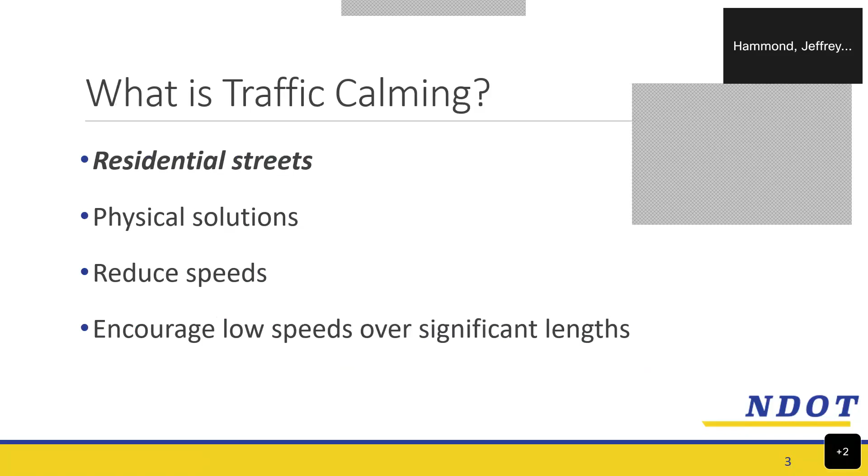So we don't focus on moving it to another street as much as just slowing it down and trying to handle it that way. And then we do focus on significant lengths as opposed to trying to handle some issue at a spot location. There are other mechanisms, other Metro programs that are more geared toward, if you want a crosswalk, there's a lot of pedestrians at a certain location, or different things like that. I'll talk about that in just a second.

Okay, I can get rid of it. Extend your screen rather than duplicating it. Can I do that? Sure, if I change it too much, I'm going to lose it altogether. Okay, yeah, let's go with it.

This is a street program and not a neighborhood program, meaning what we used to do is if one street would get you in the program, then we would show up at a meeting like this and say, okay, let's talk about traffic calming. And someone would say, I think we ought to put it on this street. And someone else would say, I think we ought to put it on this street, which is another way to do it. We have shifted recently, and now we focus on streets.

So Knob Road is the street we're here to look at. It's the street that the data points to, and so I don't think this is an issue for y'all. I think this was the only street that was requested. Sometimes we get an application that had a whole bunch of stuff on it, so we have to explain we're only doing the one where the data had that justification. I think that's about it.

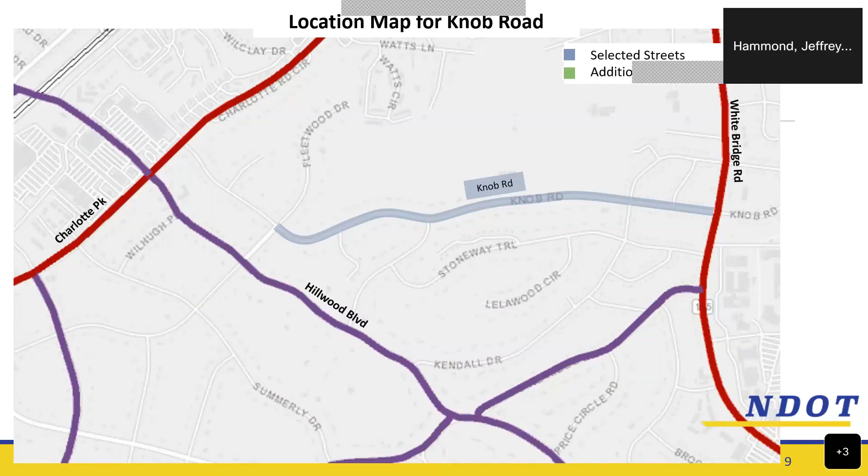Yeah, I don't know, that's a pretty long... it's real, but you're going to have to let us get through the information, because other people want to hear and listen to this, and then we can talk about it. It's okay, but let's get on through this so we can look at specific neighborhood stuff.

Just a couple of the tools that we've got. Speed cushions is a big one. Some people think of us as the speed cushion program. That's okay, because we use these often, and probably 95% of our plans are based on speed cushions.

If you're not familiar, O'Brien just got them - I know it's not very far away. There are others, Breslin I think has some. They work all the same way. We like these for a couple reasons: one, we use the same vendor for all of them, so what you see on those streets is the same product, so there's some known quantity to that. They are effective, we know that.

Lastly, there's not a lot of unintended side effects. Sometimes with some of these other tools, we put them out and maybe there's more traffic that doesn't come through there every day - like we're pointing out, this probably has more traffic that isn't as accustomed to the street, coming through here every once in a while. But these, we kind of know how traffic reacts to them.

This one gets into more of the education type component. This is what you have - you're very familiar with the feedback signs there. We're still doing some analysis to see what is the long-term effectiveness of them. We know they have some impact, but how much, and for how long over time does that stick around?

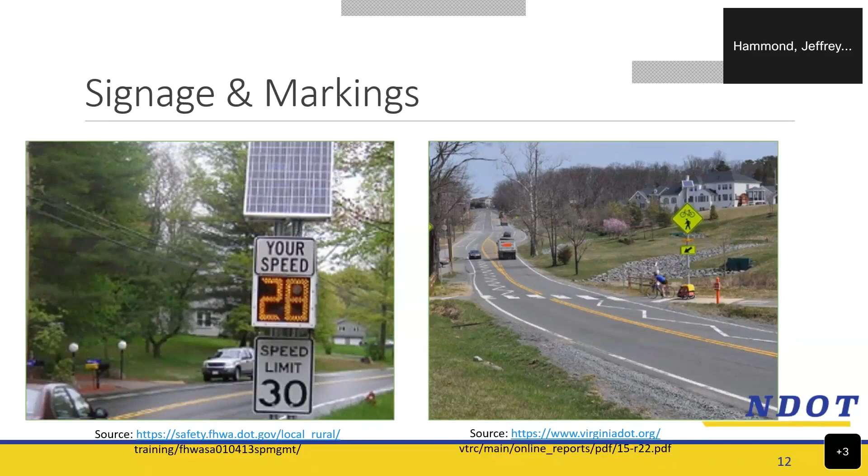Sometimes we'll do some creative things with pavement markings. Same thing there, what is the longer term impact of those. What we do mostly with pavement markings is narrow.

You all are a very suburban neighborhood, your houses are set back far, the street is relatively wide, but that context tends to make people drive faster. We know that when you can see wider and there's not parked cars and things like that. So sometimes we will use that and do some narrowing. There's not a lot of narrowing to be done on Knob - it's a standard 22-foot wide, 11-foot travel lane road. So we're not recommending any of that, but that is a tool.

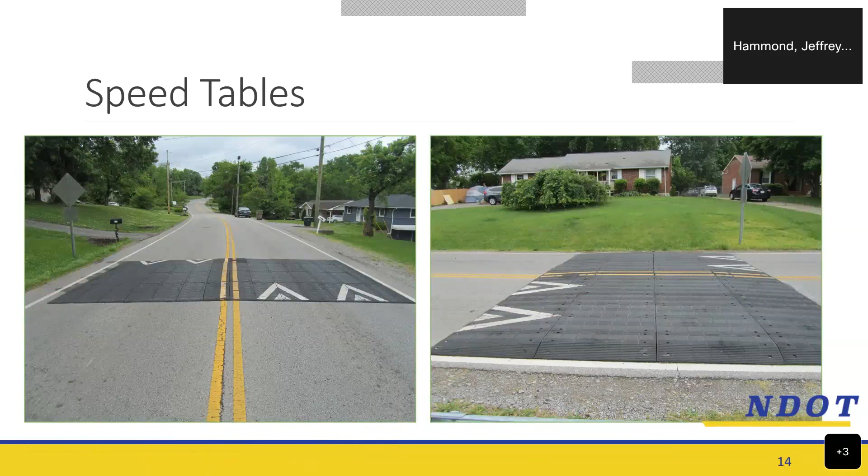Speed tables - there's one of those done on O'Brien, but it's basically a speed cushion just without those gaps in the middle. Those are typically longer and a little more gradual, so that you can go over those at a little bit higher speed.

Traffic circles, we have used some in the past. We're very careful, the conditions have to be just right. This is one of those that has some consequences - sometimes people may not drive them just right, they may want to turn in front of the traffic circle, and school buses might have an issue with them.

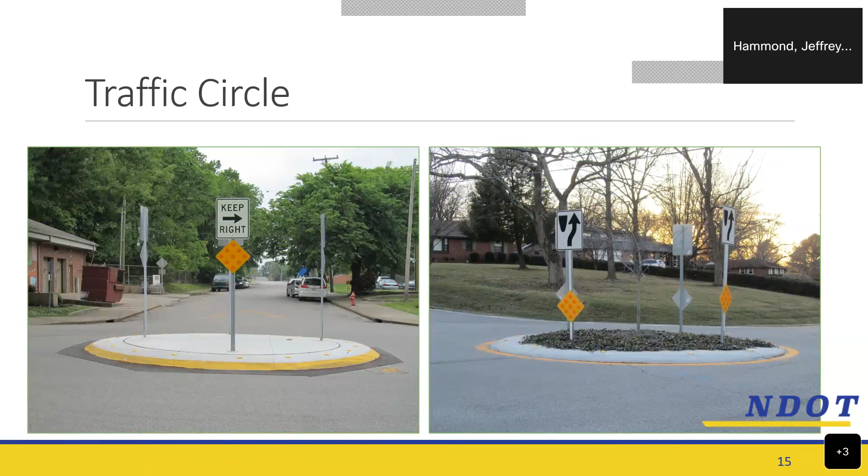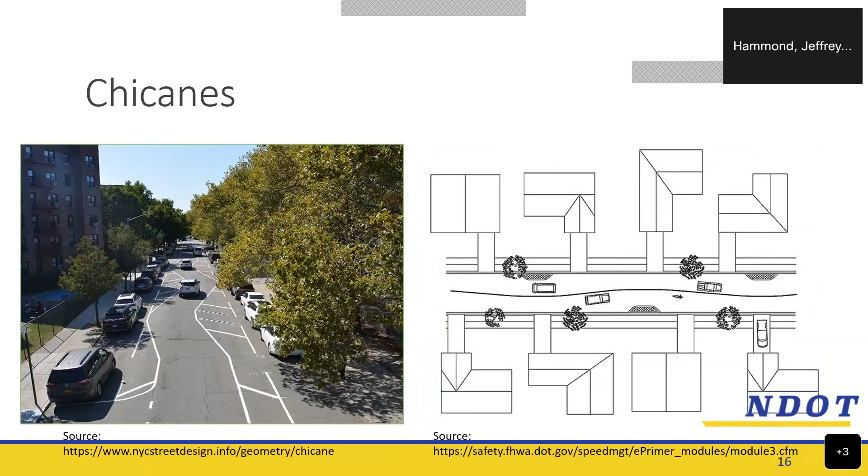We use them with caution. Chicanes are another urban treatment that mimics on-street parking. Kenner, I think, still has them. It was done with pavement marking, which is never as impactful as an actual curb or something to drive around.

So we are here at meeting one, that's the red part, and we've gone through the application. You're all in the program, so now it's a matter of settling in on the design. Once we have that, we come back for meeting two, to give everyone else another opportunity to hear about it, learn about it, and have their say. Then we go to an online ballot process. I'll talk more about the mechanics of that in a second.

That's pretty close. So where we are right now, we're still looking from White Bridge to Fleetwood. Coming from Fleetwood, it's a pretty big hill up to this point, and then you get to the apex of that hill. That slopes about 8 to 9%, which is pretty steep. We don't do speed cushions there, we try not to do anything over about 6%, and we definitely don't do anything over 8%. So we haven't recommended anything on this end.

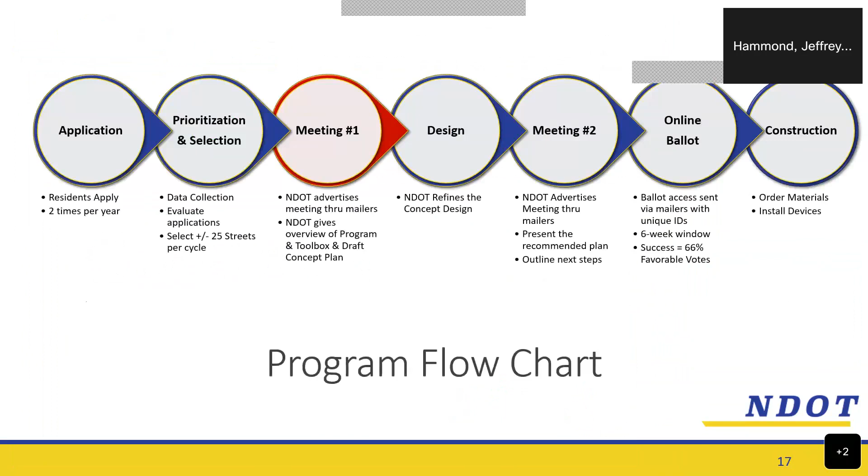These cause a problem for people trying to get from point A to point B. If they have to cut through—the fire department right there next to EBA has to come off the west end, come straight down White Bridge Road, and cut through to get to Charlotte, over say the Publix at the bottom of the hill, or anywhere there in the west. There's no way around it—you've hurt them as far as their time to get from point A to point B.

I've seen the fire trucks going down the street—they're not going 60 miles an hour. They're slowing down because they're in a residential area. And you're not talking long enough for it to really matter that much. Your house is on fire and you're doing 15—it's not going to change much.

And I drive a full-size truck and I'll kind of hit the outside—I still have to slow down to do it, but anything wider than that, you're going to be able to, not fully straddle, because we've talked to the fire people about this. They know we do this program, they're very aware of all of that, and they don't have a problem with them.

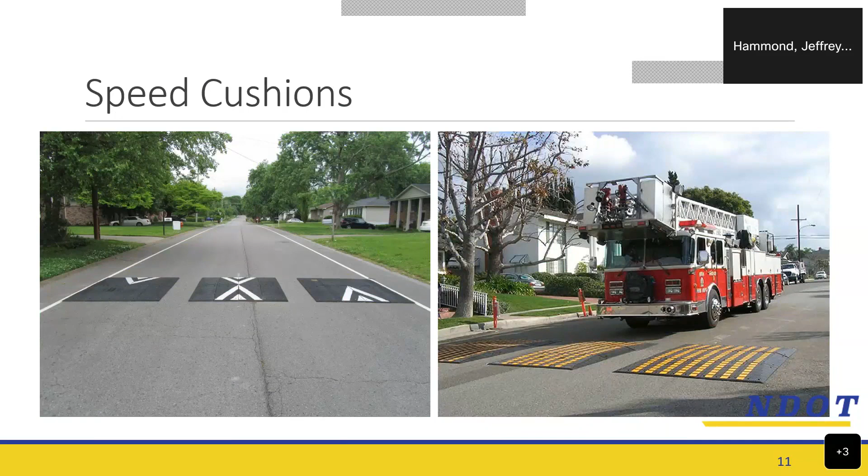And especially when we take those over to them and lay them down and look at what impact that has, because those wider wheelbase vehicles are not as impacted as you or I would be going across. So I didn't point that out earlier, but that's an important observation.

If there aren't any streets—which streets are you going to be balloting? So the ballots work like this: we will take, there's only one street we're going to ballot, and that is Knob Road, within the limits of the project.

So the limits again are Fleetwood to White Bridge. We're going to take properties that are immediately adjacent to Knob Road all the way down. I didn't highlight the church property because we don't do institutional uses or vacant lots. There's one little sliver of lot that doesn't have anything on it - we wouldn't ballot that. Everything else we would.

We have a bit of a special case on this Goodwood Place. It's owned in common - one big parcel, but multiple units. We would anticipate balloting all the folks that own a unit up in there. It's not very... that's on Aldine Court.

No, that's true, it's called Goodwood Place on that map, but... Oh, that's over on the top of the hill. No, I don't understand where you're taking them. Why did that spot get put in there? It's within the limits of that project, so that's just our policy.

A couple other aspects on the ballot process - this has been a pretty big change, and I think a welcome change for most neighborhoods, is that NDOT handles all the balloting. Used to, we would say, Bob, you're the applicant, go door to door, and you've got to talk to every one of these people and get 70% of everybody. In some neighborhoods, you can imagine, it never was going to happen.

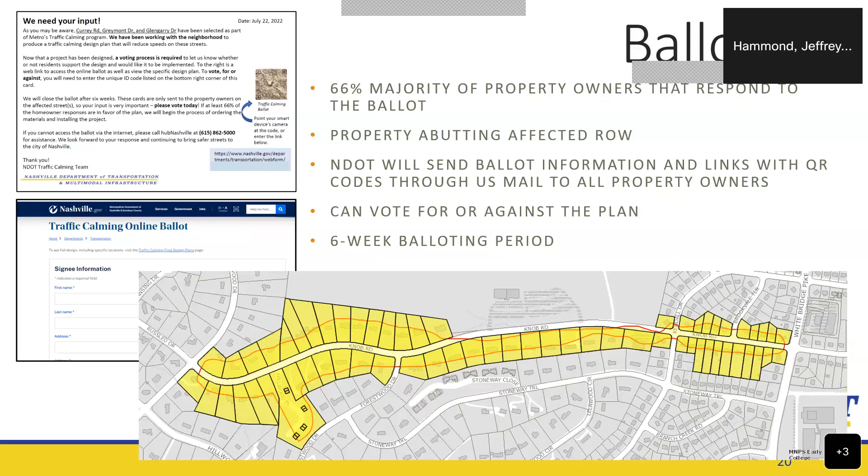Look, when there's snow or sleet or what have you, from the top of Knob Hill down to the bottom of Fleet, it is impossible to even navigate that. And you put in speed humps and you're trying to go over a high speed hump. What he said, it stops at the top of the hill. Right, it's steep, you don't do it. So you don't use that road when it snows?

So what happens then? You think you don't use it when it snows? I go up when it snows or whatever's there. There's no speed bumps there to affect you. They affect you here, but you do have the option to go over to.

How are your salt trucks and ice trucks gonna scrape the roads with speed humps in the way? That's a good question. Let's hear the answer for that.

It's totally not impossible - they do keep a log of where we've applied speed humps around the city. Our drivers know that. There's also signage that goes up. We typically don't sign every location, but when there's a number of cross streets, there'll be signs that designate that, so that's another clue for plow drivers that, hey, there's one coming up. But they are aware that there will be humps.

I have to go, thanks so much. Thank you so much, this is the next step.

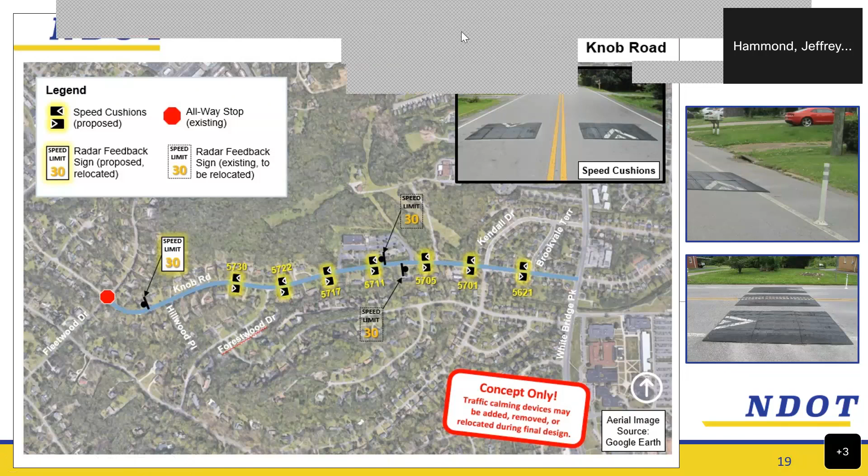Because that's it, they're driving so fast. We have to remember there's a daycare on the street. Yes, they have those little red buggies, and that is so frightening. They're on the sidewalk, taking up so much of it right by the street, and people come flying through there.

When do they walk the children? I have never seen them on the... the daycare does, and we have those red buggies with 6 kids in them. We do have small children, and a lot of parents who walk their children, and people who walk their dogs.

It's very dangerous. I used to walk up the hill and pick up my kids at daycare, and now it's been a couple of years, but I would be glad to do it today.

More people walk on the street than they ever did before. Nobody ever... but I appreciate it, so I mean, you must put in sidewalks, that's not a problem.